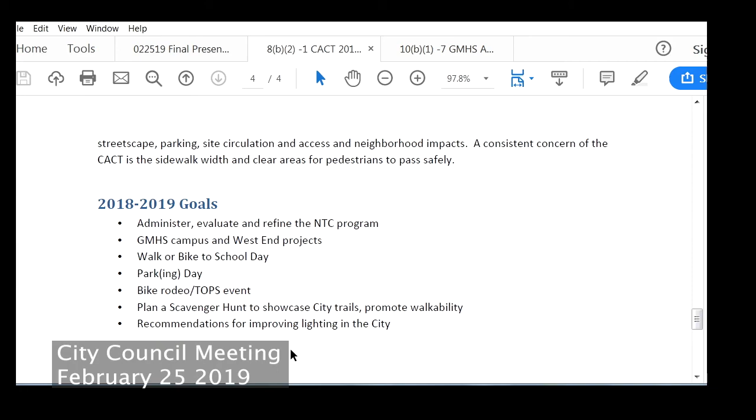Well, thank you very much. I know we all appreciate the good work you all are doing, and I think it's become one of the priorities of the city to improve walkability, bikeability, pedestrian access, and just really tie our community together without cars. So I think you've all done a very impressive job.

I'm sure there's some questions from my colleagues, and Ms. Hardy seems to be nodding, so I think we'll start with her. Thank you, I'll echo what the mayor said. Thank you for being so active and really at the forefront of championing walkability and bikeability, which I think is really important to this council.

Couple questions. On the neighborhood traffic calming, I was very excited to see that $800,000 grant, which we've talked about for a long time now, is coming up in fiscal year 2020. Do we have a sense of what projects those will fund? That's the first question. And then second, is it too early for us to start thinking about applying for the next round? So I think when we last applied for this was like 2 or 3 years away, and now the time's come upon us.

Maybe we should think about the next round because we'll probably spend the next 2 or 3 years using the $800,000, and then we want to make sure we have money waiting for us because I don't think traffic calming is going to be done in 2 or 3 years. No, I don't think we'll get through all of it.

I'd like to ask Jeff if he might be able to answer those questions. Our city staffers made the applications for those grants, and I think we have a number of cases in the queue. As you know, we can only manage 2 cases at one time, for staff reasons. So currently we have the Gundry Drive area and also Little Falls, Great Falls. Jeff, do you have anything to add?

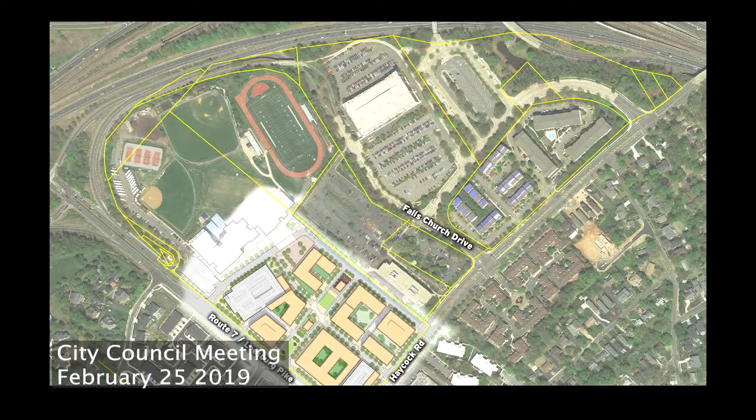So it's visionary. You guys were the visionaries and did most of the heavy lifting on this project, and we're really happy to be here with you today. The next slide.

These are the precedent images which we initially shared with the city. What's great is over the last 6 months, these have not changed all that much. These were renderings we did in August over a 2-week period when we had to respond to the RFQ second request, and we've really tried as best as we can to hold to this.

What you'll ultimately see in our SE application is largely a brick style of architecture fitting within the city, with some modern elements here and there. This really fantastic Commons Park space is the central design element of the entire project, and that's remained unchanged throughout. The civic building with music venue and other arts components is right there on the upper right.

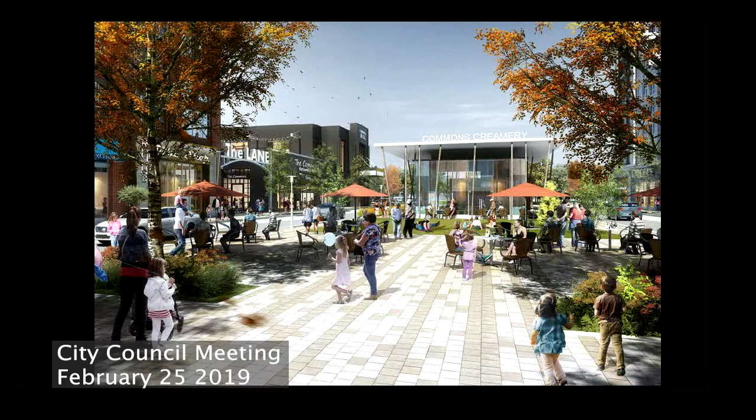The next image is that image again from inside the Commons, and we think ultimately in 4 years, when we're all standing in that Commons at groundbreaking and we feel the sun on a beautiful day in this really cool park space that we'll have delivered to the city, hopefully everybody will feel like the time was worth it.

The next image is getting into the SE application. As you heard from staff, the SE application is really at a 10,000 foot level, and then when we get into the site plan, we'll get down to 1,000 foot level over the next 18 months with all of you.

This is a blocking diagram that works really nicely for the site. Things may shift a little bit here and there over the next 18 to 24 months, but this is where we believe things will go. The organizing principles haven't really changed.

The grocery store is on the main block, Block A, at the bottom right. The retail Main Street is located where it is because it's the flattest portion of the site, allowing outdoor cafes lining all of those retail frontages. That street is directed towards the metro station to encourage walkability. Then there's the interaction between the school and the economic development project, both within the above-grade parking deck - how we design and wrap that in something fun and artistic - as well as the interaction between the high school plaza, the main plaza, and the hotel building.

The next slide gets into a little bit of phasing, and once again, probably one of the greatest benefits of the project and the way we're designing it is that we're delivering so much of this up front. A 1.4 million square foot project is a big project for any jurisdiction in the country, maybe with the exception of Manhattan.

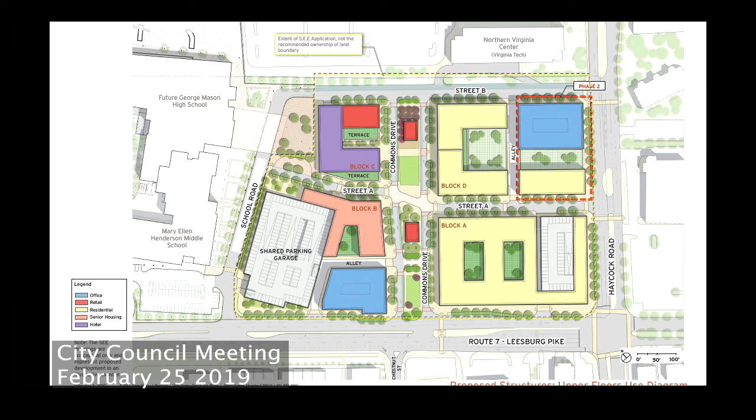The next slide, this is really the heart of the SE application. This gets into densities, mins and maxes for density and phasing. In this part of the SE application, there are binding elements that commit us to a minimum on office, hotel, commercial, and retail uses, and a maximum for residential uses, as well as a range.

That gives us a little bit of flexibility, but really gives the city what you guys want, which is some certainty as to exactly what's going to ultimately get built and what's going to be brought before you at the SE. And these numbers marry up with the interim agreement.

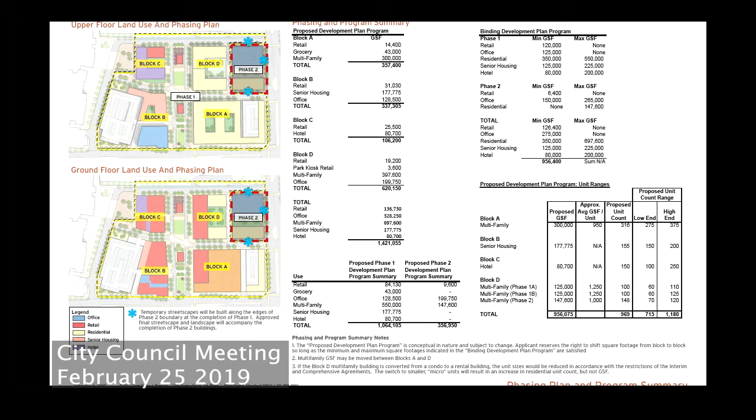The next slide, these are 3D axonometrics, and of course, at the next stage, what we're really excited to do over the summer is really get into building architecture and start thinking about how these are going to look and feel, and which buildings are going to be what colors, and all the fun stuff we're going to do over the next 18 months.

But right now, what the SE application has are largely blocking diagrams to give people a sense of scale, size, and building placement. This shows the full 1.4 million proposed square footage as laid out on the site, in view from the high school.

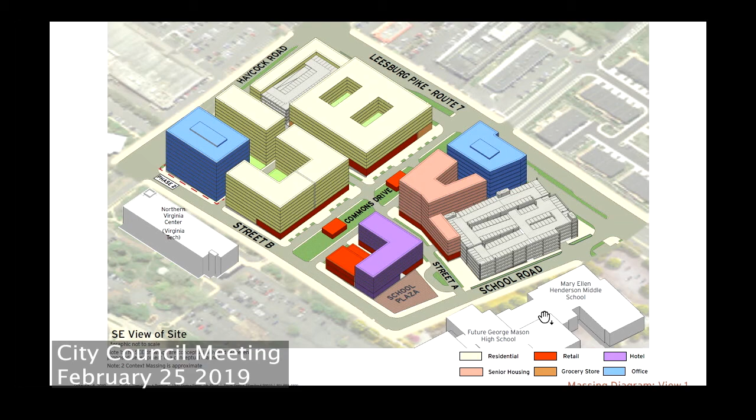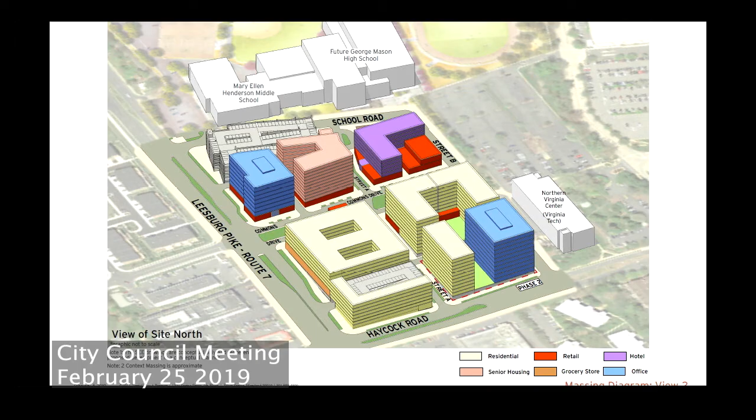And then the next image is in view from Route 7 as a bird's eye looking back towards the high school. You can see different heights of buildings, undulation of height. One of the nice portions is since our wood frame residential building is the lowest building at the corner, that allows as much sunlight to get onto the main street during the day, especially during the morning and early afternoon hours, which is nice as well.

We've already taken down the portion of the senior housing building nearest to the school to 7 stories maximum, and that's an example of us trying to be responsive.

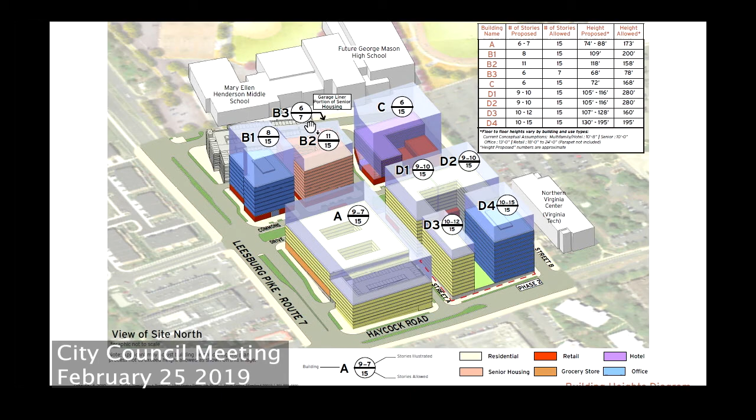The next slide is a sunshade study. This is new, something that was requested, I believe, from council or school board, I can't remember which. So this is now in here, and it really does show, with the exception of the winter solstice, where most things are in shadow in the early evening, we've got really great daylighting, certainly during the summer, and during the fall and spring equinox, with very little shadow cast onto the school, except during the winter solstice in the morning.

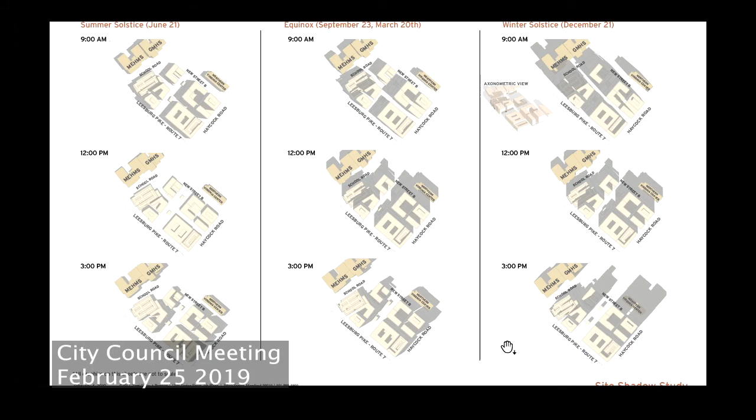The next slide is the third most important part of the SE application, which is parking. As staff just described, on the upper right is a table where we've looked at minimum and maximum parking for each use. In each case, the highlighted yellow is the city's current regulations, and in white is what we're asking for.

For example, from an office perspective, we're asking for 3 spaces per 1,000. The city code is 2.22 spaces per 1,000. So what we're committing to in the SE is a range of 2.22 to 3.0. That gives a maximum, which is what we've asked for, and a minimum that the city desires, giving us the flexibility over the next 18 months to figure out exactly what that ratio will be. We've done that for each of the uses: residential, retail, grocery.

So the binding elements would be that range of parking, and then this specific parking number would be worked out with all of you during the SE site plan.

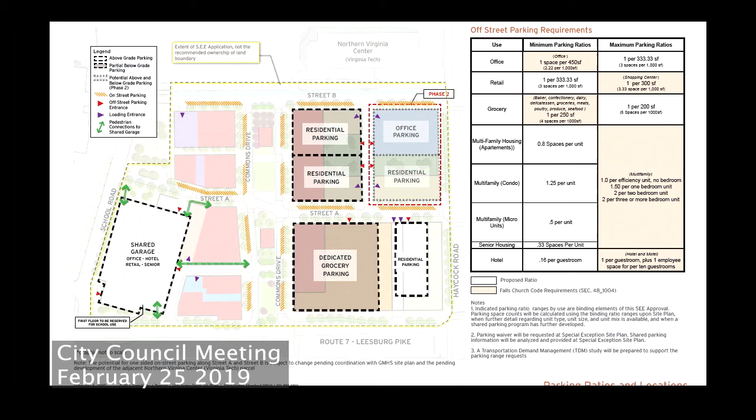The next slides are sections through the building, through the streets. These will get more highly developed as we get further along, where you'll start to see the retail kiosk buildings and the furniture pieces and everything else within those public spaces to bring them alive. But for now, it's really more for sense of scale and for how transportation will function within the plan.

The unique part about this design is we've separated northbound traffic going towards the metro and southbound traffic into 2 one-way paired streets with the park in the center space. The nice thing about that is it slows down cars in both directions by narrowing up those lanes instead of having a 2-way traffic situation. It also makes it easier for pedestrians to walk across the street because they only have to look in one direction as they're crossing, as long as somebody's not driving the wrong direction.

We put the bike lanes on the inside along the park for 2 reasons. Number one, so they have better access to bike parking, which will have bike stands within the park space. Secondly, so that they're not up against the cars and getting doored as people open their driver's side door while riding on those bike lanes. Those bike lanes will hopefully continue north all the way to the metro, providing a great link from Route 7 all the way to the metro, and also to the east-west connection going to the high school and middle school.

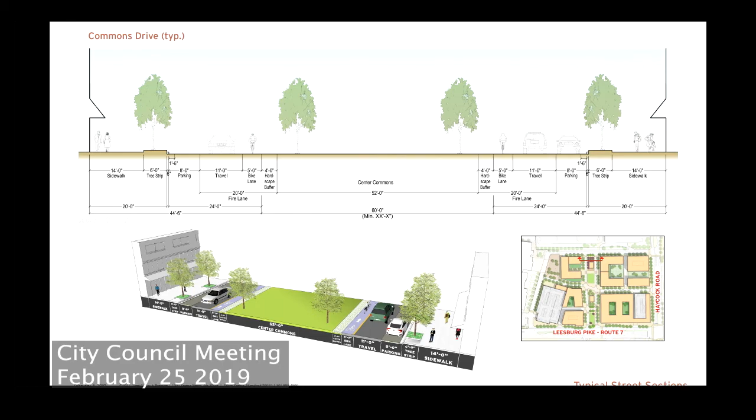The next slide, I won't go through each of these in detail, but in the package you'll see sections of every single street we've proposed. We've added a few since our initial presentation a few months ago. This is for Route 7 and for Haycock Road, the big public spaces surrounding the site.

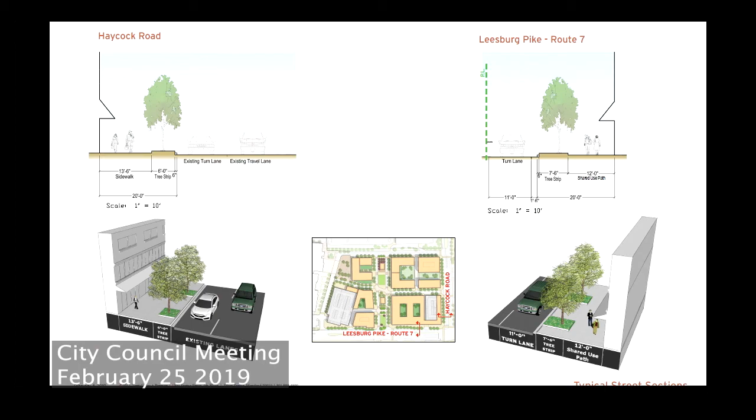The next slide has both Street A and Street B, which will have names at some point. Street A is being named by the city and by the high school, I should say, and Street B is a name that we'll ultimately come up with once they've selected their first name. I had that backwards, sorry — Street A is our street, and Street B is the school street.

Street B is probably the most interesting in that it allows for a 2-way bike lane cycle track on the north side of the street between the Virginia Tech parcel and the development site, to really create a safe route separate from auto traffic for students to get to school.

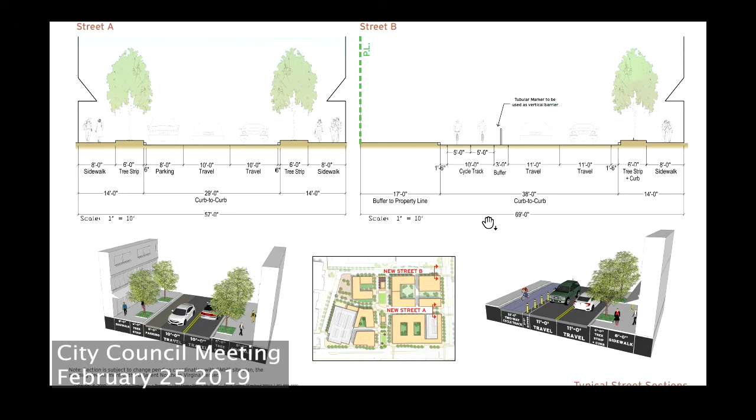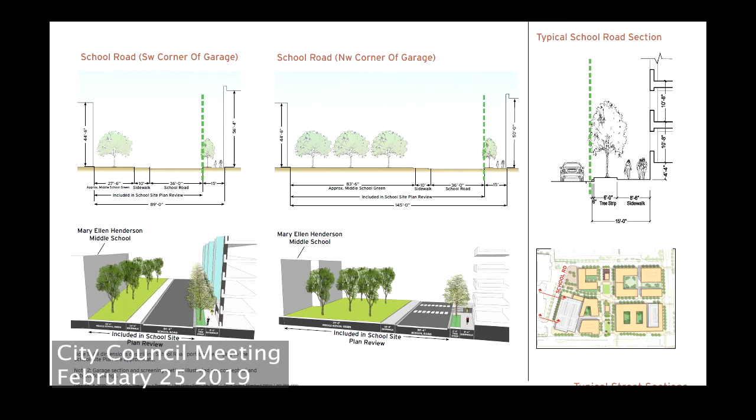The next slide is the remaining sections, which we didn't have in our last package. These are up against the proposed parking deck, and it gives you a sense of scale, and shows that there is a nice big pedestrian sidewalk and street trees on that side as a buffer between the parking deck and the school. Our next image — these are early, and we'll get more detail over the next 3 months.

This is something we presented to the schools a few months ago: the idea of doing something artistic on the buildings, on the parking garage. We've requested a meeting with the schools to talk with their art department about concepts for what this might look and feel like. The goal is to have more detailed images as part of our project that you'll vote on in May, as part of what's called a placemaking and amenity plan. There would be a parking section within that, giving the community a sense of what it might look like.

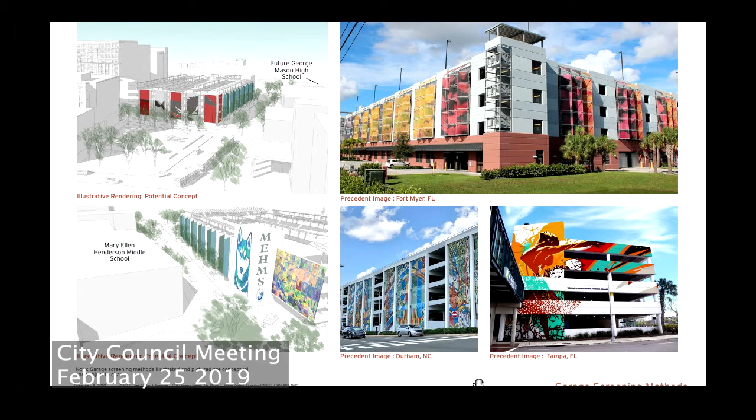The next image shows more examples of these types of elements. To the extent it's done well, which I'm sure is everyone's biggest concern, it can be amazing and something people come to see from far away. There are examples of garages like that all around the country, where people actually talk about the architecture of the garage. But it really has to be done well, or it will look cheap, so that's something we'll focus on.

These are more banner-oriented versus art on the building, depending on who ends up doing the artwork. To the extent high school students themselves do the artwork, that could be a better way to do it, because they can work on it all year and then just bring it up when the time is right and post it onto the building, versus doing it in place.

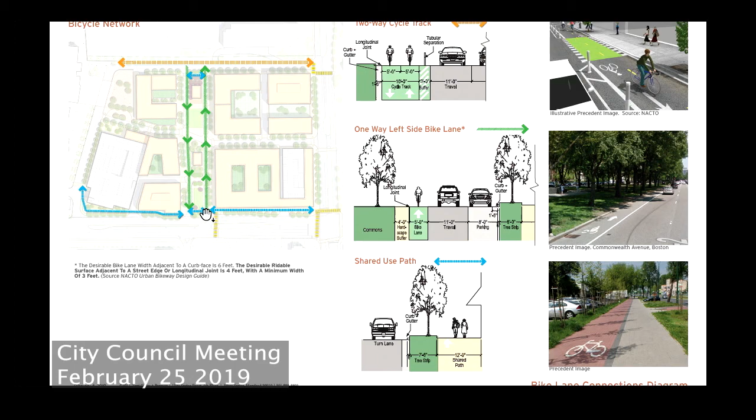The next images go beyond the parking and start talking about transportation and bike lanes. You can see the bike access all throughout the site, both along Leesburg Pike, along Street B to the north, as well as on the Commons, and the spacing and sizes of those lanes.

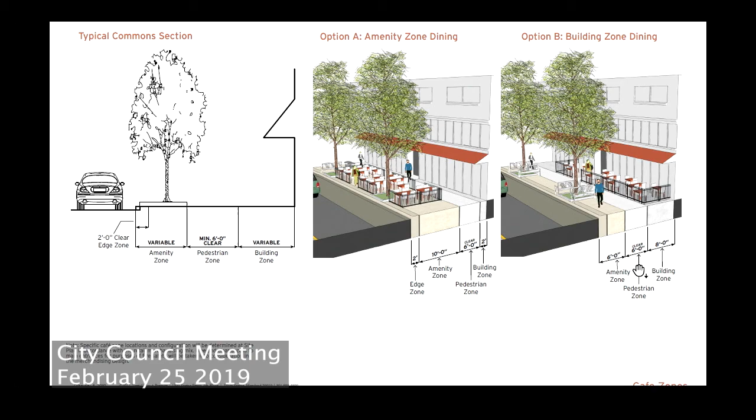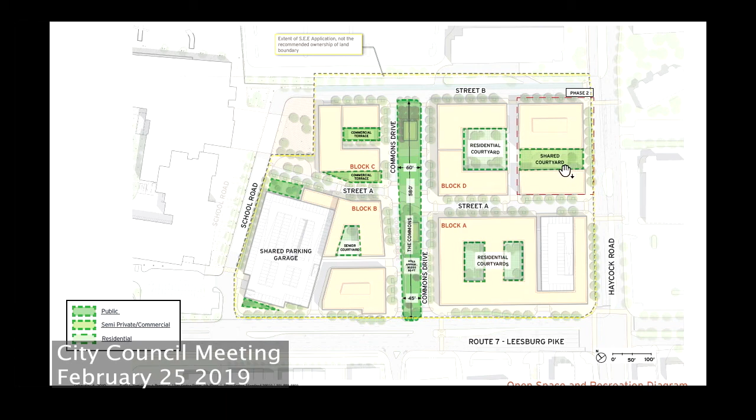The next image is our open space exhibit, showing all the green space and the size of the park with dimensions. The next slide is a tree exhibit.

Now we really get into the landscape images. The last time we presented to all of you, we had just hired our landscape architect; she'd been on the project for two weeks, so things are starting to develop more detail, and that will continue over the next 12 months. We're starting to think about how these spaces break down, their sizes, how many people we can fit for different events, how we can close the street to cars for larger events in cooperation with the city, and what it's like to cross the pedestrian walkways where the materials might change. All of that is work we still need to do, but you're starting to see the images created, and the connection from the plaza space all the way to the high school.

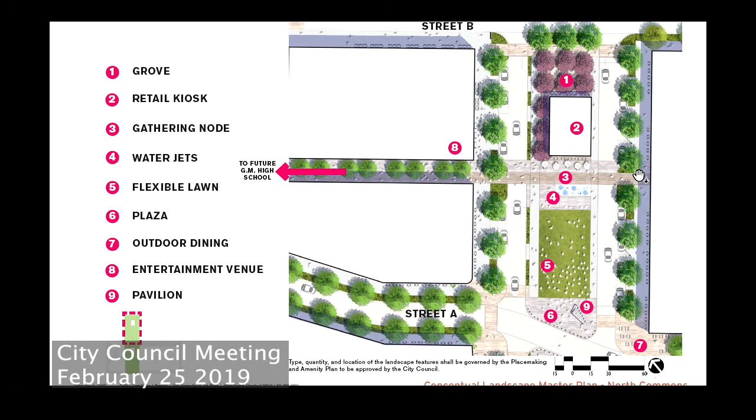On the next slide, this is the northern portion of the Commons closest to the Virginia Tech site, where you have the hotel, the music venue, and other civic spaces. The idea is for this to be the most active part of the common space, with a lawn, great flexible furniture, umbrellas, four rows of street trees, and examples of kiosk buildings in the park to keep it lively.

The next image is the southern part of the Commons, which bleeds out onto Leesburg Pike. Here we will have open space, more passive space, heavily landscaped space, stormwater management space. The idea is to take you from the Pike, which is a very busy street, and calm you down as you enter the project into something that's more like an oasis.

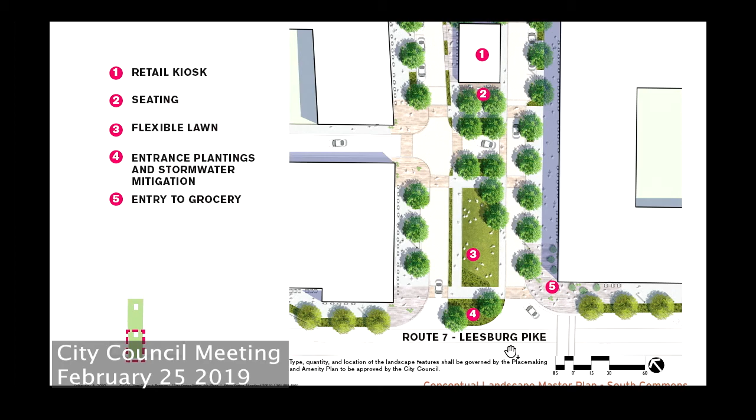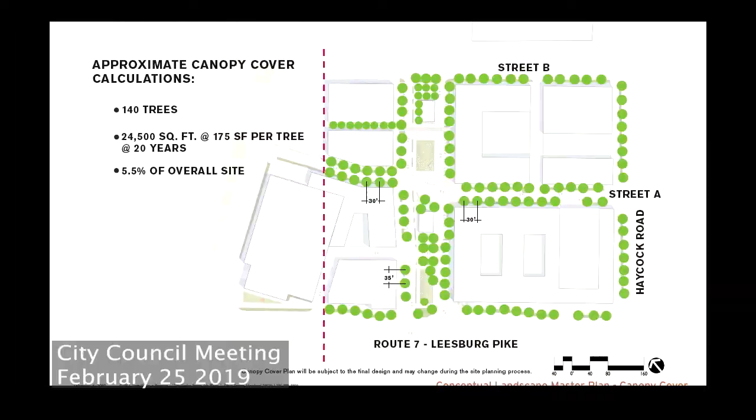Okay, the next slides, we just keep going. This is our canopy coverage slide, and we start getting into the engineering slides. We can fly through these a little bit.

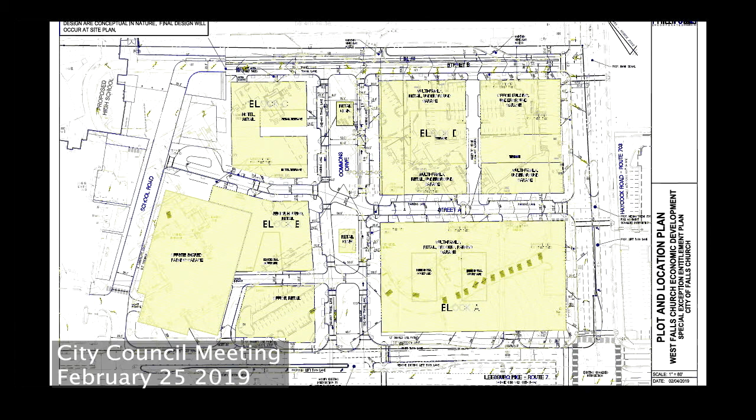That was our utility plan. Sorry, go back one slide - there we go, perfect. Go back, I think, one more. Oh sorry, go forward, go forward, go back, go forward - there we go, perfect, sorry.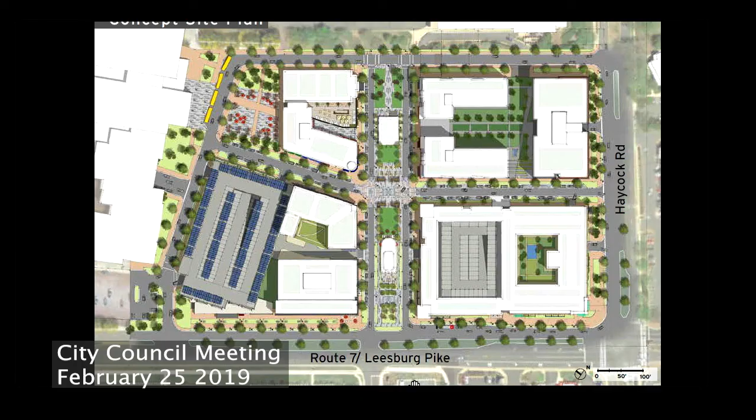And then lastly, a portion of our SEE, which is not pictured in these images, was a written portion. Within that written portion, we have the binding elements that match the interim agreement we've negotiated with all of you. We have descriptions about sustainability, from stormwater management to our LEED commitments, and we have affordable housing commitments as well.

So the written portion is equally important as the imagery. We look forward to answering any questions you have on any and all portions of our application, and to working with you over the next number of months on this project.

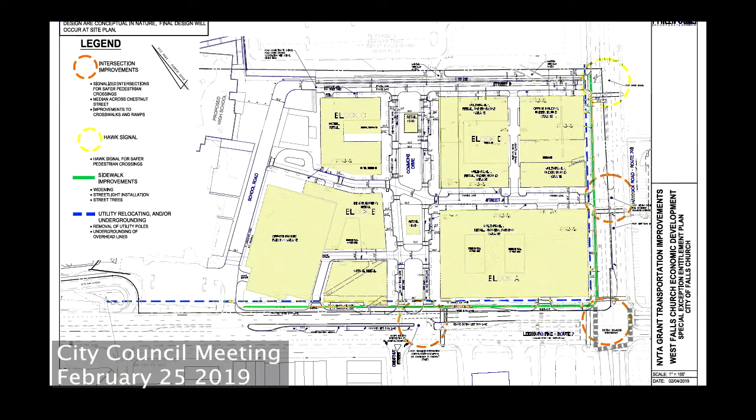So my first question relates to that picture - that's not the picture we're actually dealing with right now, right? No, we should go back to the SEE site plan. One of the first, like the fourth or fifth slide. Yeah, one forward, keep going, forward. Oh, that's good, that's fine. Yeah, yeah.

So last week when we were talking about this, Ms. Hardi mentioned the corner of Leesburg Pike and Haycock Road, and that's an important corner. I know these things are evolving as we go, but I want to make sure we say in as many ways as possible that it needs to be a signature corner of this project, because it's going to be visible from far, far down Leesburg Pike. It shouldn't just be an afterthought of the grocery store or a wraparound of the parking garage. Yep, yep, we completely understand that.

Okay, that's good. And the other thing I want to say, and I know we talked about this last week too, is that as we've talked about these different blocks, you've said they may change within their block. So Block C, for example, which has the music venue and the hotel, has changed from your original submission. It may continue to change as we go forward, in addition to height and the actual placement of the buildings.

Yeah, so the whole concept is - and thank you for asking that question - I base this a little bit on the Montgomery County process they have for zoning, which is similar to what you've enacted here. There's a great example where the central block of Pike and Rose was originally supposed to be an office and residential building. It ended up being a 200-unit hotel, which we moved from another block, and the office building swapped with that block, and the condos ended up on top of the hotel because we had 20 stories there versus at the bottom. That was over a similar period. We got approval, and then over the next 2 years, as we worked through the specifics of the plan and found the hotel operator and figured out exactly what we were going to do, we went back and asked the planning board to make those modifications.

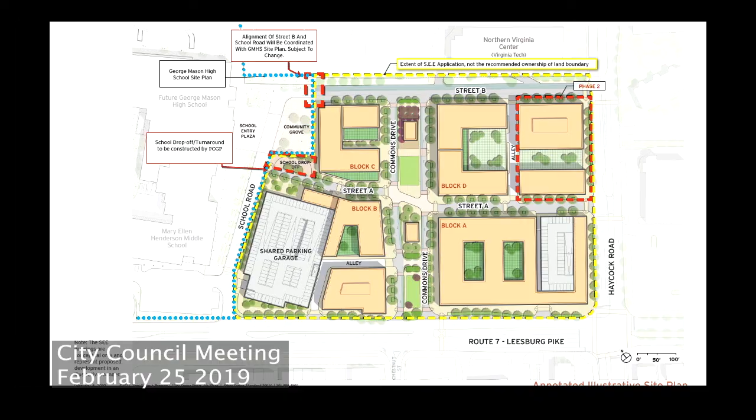Yeah, so in 10 days we're kicking off our placemaking and amenity process, which will have heavy involvement from the very tops of all of our organizations. Monty Hoffman from PN Hoffman really cares a lot about that and was heavily involved with it at the Wharf, as well as Bob Youngentob and Todd at EYA.

That will start in about 10 days, and then we will start interacting with you about those types of ideas. What I'd say here is this is 10 acres, so I think where you'll see the neighborhood differentiation, there will probably be maybe 2 or 3 types of neighborhoods within the 10 acres. But where you'll really feel it is as this becomes the larger 35-acre site going all the way back to the metro.

So the goal would be to have these 10 or 12 places where the architecture is a little different or the retail mix is a little different, exactly what you're talking about. We're not far enough along yet, but yeah. We'll work on all that. I'm excited to see that. This is really the fun part of the project, when you get into the nitty gritty aspect of it.

And I know things are still evolving between SEE and SP, but just on that question—I had it written down, but it made me think about it—on the WMATA site, is there any insight you can provide to us as a developer involved in this project in terms of your communication with what's happening at WMATA?